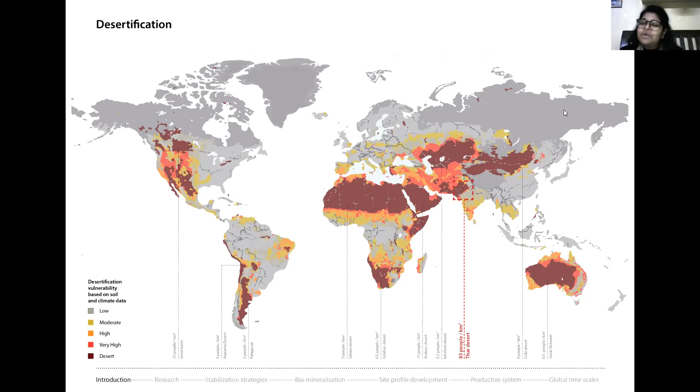For our thesis, we primarily focused on the world's most populated desert, the Thar Desert. The Thar Desert constitutes the northwestern part of the Indian subcontinent, where 76% of the land is exposed to wind erosion and sand deposition forms of land degradation. Within this region, our test site is subjected to an extremely high wind erosion index, meaning the strong winds blowing in the region make the terrain absolutely unstable, with a constant influx of sand into the region and a constant dissipation of sand out of the region.

Using Landsat imagery, when we zoomed further into the area to see if there are possible settlements, we saw these mushrooming small settlements within the region, mainly housing the interdunal plains. What happens in these interdunal plains is the wind velocity drops, and that is where maximum sedimentation takes place.

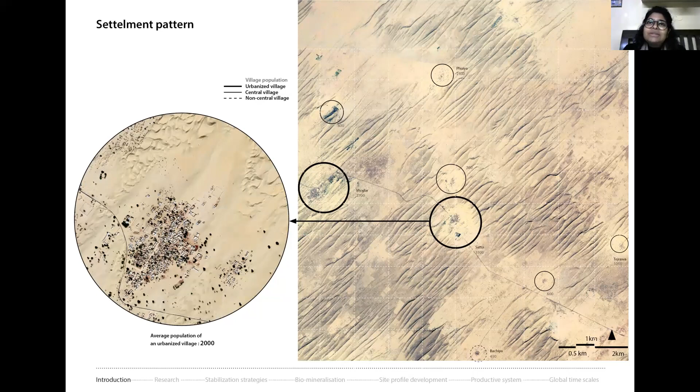By Landsat imagery, we realized that all these settlements were actually informal settlements, rural areas, decentralized villages which lacked infrastructure. Also, because there was a serious dearth of information that we could find, we made a visit to the site to see the ground realities.

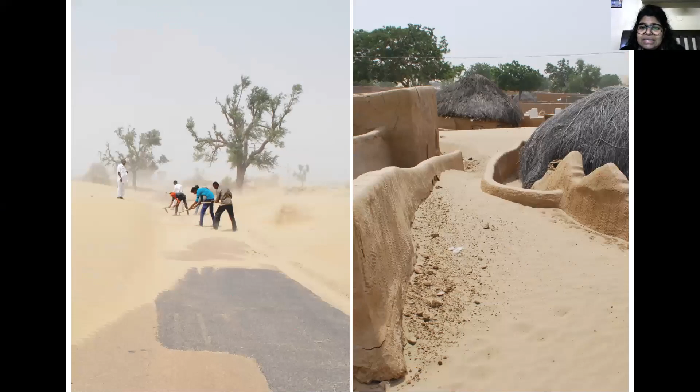To my shock, we found that the weather conditions and living conditions are so extreme that they don't even support the life of livestock. The infrastructure is still very primitive and vernacular. The terrain is absolutely unstable with constantly changing and shifting grounds, and even the existing infrastructure is subjected to heavy sedimentation.

Towards my right, these are houses which were completely submerged under the sand. And this was the only road leading to this remote area of the country, which was again absolutely covered with this constant influx of sand. People had to manually remove the sand from this region.

Another observation we made during the site visit was that there's an absolute shortage of water resources and a significant absence of green cover in this region.

This made us ask how we can tap into sand stabilization techniques and redesign the settlements in this region. When we were asking this question, we always kept at the back of our mind one thing: whom are we designing it for? Our idea was that since the people inhabiting these regions are locals, migrants, mainly agriculture practitioners, these people are well versed with the textures, colors, and materials of that region.

Whatever proposal we propose has to come from the site. We cannot immediately propose something that is very alien to these people. This image on the side is our first design ambition. It's not a design outcome, but a vision where water, agriculture, and habitable spaces could come together in synergy. At the same time, the highly unstable terrain can be stabilized, facilitating the flourishing of these systems, while a natural mechanism deflects the influx of sand out of the system.

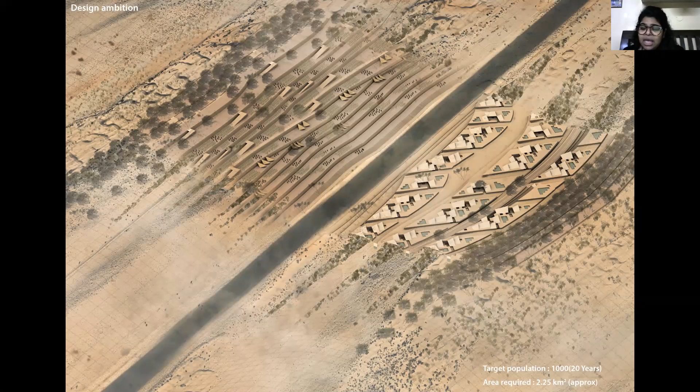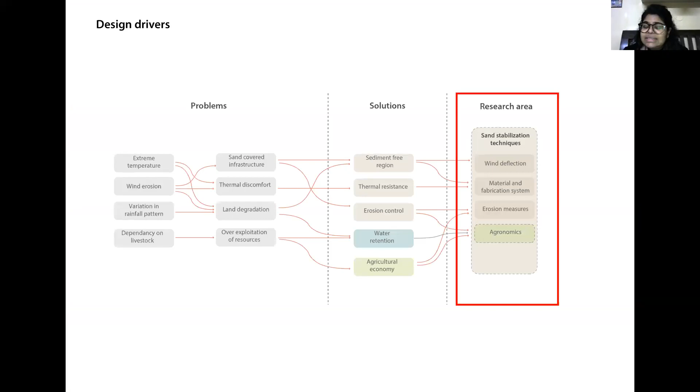These were our prime goals when we went into the research part. My main research areas for the thesis were wind deflection systems, material systems, erosion measures, and agronomics. When looking at ecological measures, we were conscious of creating an amalgamation of existing and modern mitigation interventions. The erosion control and wind deflection systems are primarily traditional systems still followed in the area.

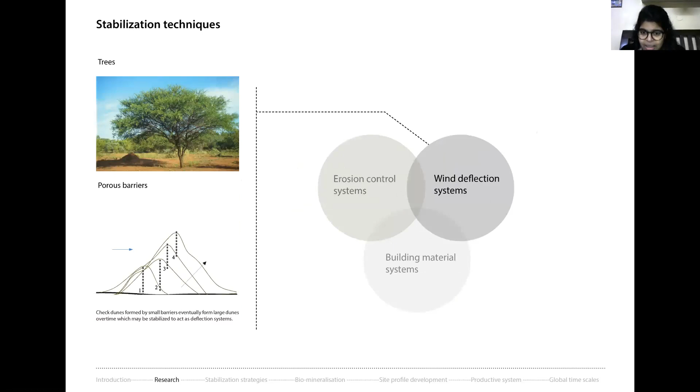We specifically wanted to focus on a new building material system. Looking at the site, we made a shift in how we viewed the problem: the abundance and influx of sand suddenly became a resource for us, since sand could be used as a new type of building material if combined with a proper construction binder.

So we looked into the technique of biomineralization. This is an existing technique investigated by material scientists, engineers, and architects, where if you take sand and add biopolymers, they form a gel matrix in the sand, creating a really strong material with compressive strength comparable to a concrete block. At the same time, it has ecological benefits, being biodegradable with almost zero carbon footprint.

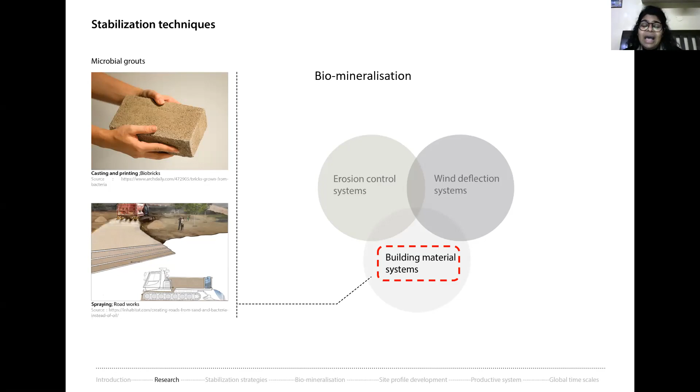To explore this material system in context of our site, we looked into the biopolymer sodium alginate, which is readily available from the vicinity of the site, and investigated how we could develop a composite material system from it.

If you mix this biopolymer into sand and add calcium, you essentially get a composition similar to sandstone. Historically, all the monuments in India, specifically in this region, have been standing for centuries, and the prime composition of these heritage buildings is sandstone. So biomineralization helped us attain a very strong material with compressive strength comparable to a cement block, with lower carbon footprint, and the curing time is almost half that of a cement block.

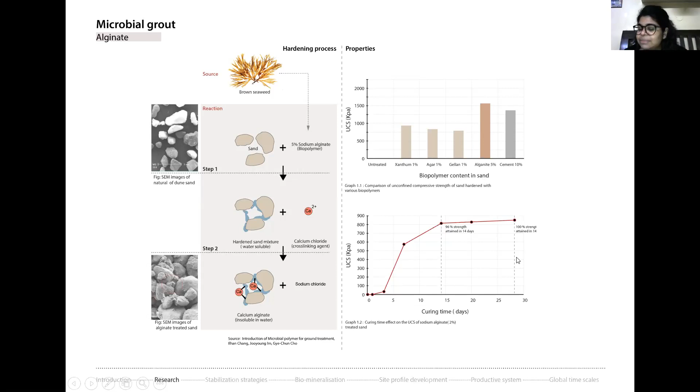We further wanted to investigate ongoing research on the fabrication mechanism of biomineralization. We came across an interesting study carried out at TU Delft with other institutes exploring biomineralization and scalability. They tested the hardening of sand for different volumes using dry mix and cast method versus injection method, where you inject biopolymers into huge volumes of sand via biogrouting. The results showed biogrouting is an efficient way to scale up this technique.

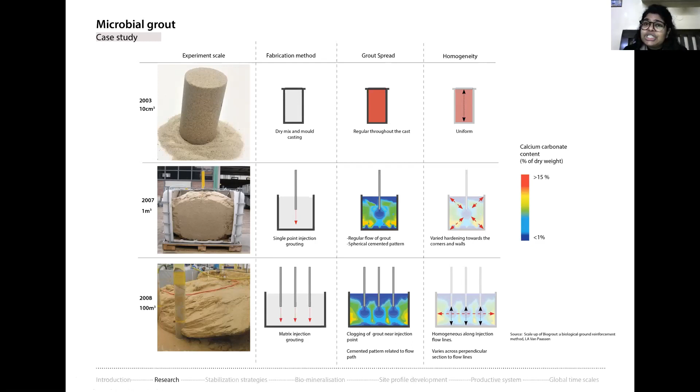Even though the homogeneity of the sand mixture reduces as you scale up, with increased density of injections you can get more homogeneous and compact sand. This suggested and gave us a hint of what fabrication mechanism we could explore to develop our site.

For the stabilization technique, now that we had a material system and fabrication system in place, we had a vision to use this material system to stabilize the existing sand and convert it into agricultural terraces and in-dune structures. At the same time, for incoming sand, we wanted to deflect and automate the deflection using the wind itself.

Earlier I showed you the picture where strong winds bring in the sand, but we looked at the strong winds as an opportunity to take the sand away from the system. Once we had these three things in place, we could bring water and agronomics back into the equation and create a holistic developmental plan for the site.

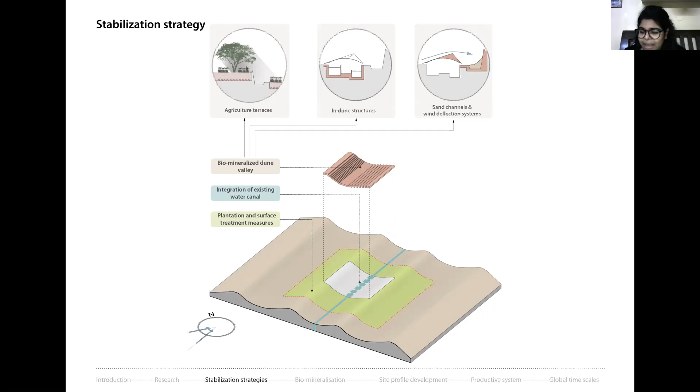But before we proposed that, it was essential for us to understand the dynamics of the region: how the wind brings in the sand, from what direction, the velocities across a dunal section, and the net sand transport direction.

So the sand is predominantly getting winds from two directions, and the resulting vector makes the site transform into this array of linear dunes. And because of the bimodal wind, the site gets divided into windward and leeward faces. Because of this, the shape or section of the site shows a varied pattern in sedimentation.

Where maximum sedimentation happens on the dunal crest and least sedimentation happens in the valley, where the strong wind vector filters away the sand. Now going further to biomineralization, taking inspiration from experiments done at TU Delft, we proposed our own mechanism where we selected a machine that could run over the dunal fields with a matrix of injections and inject large chunks of land at the same time to accelerate the fabrication mechanism.

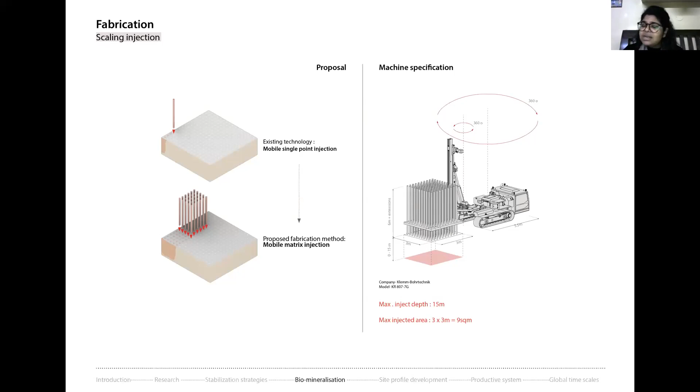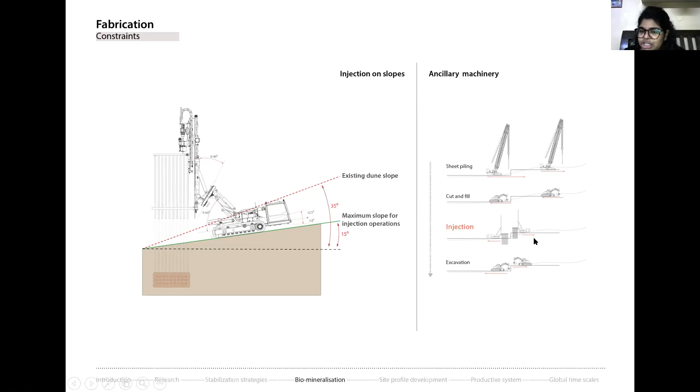The picture on the left shows how the machine is efficient in traveling over the dunal fields and injecting at different depths. But the existing dunal slope was greater than what the machine could withstand, so we also proposed manual flattening of the dunal slope wherever we wanted to inject the biogrout. For that, we needed additional ancillary machine support—just like construction in mountainous regions, you have sheet piling, you remove the excess sand to flatten the dunal slope, then inject and at the same time excavate the unhardened sand.

So our next course of action was to develop a toolpath for a machine. For developing the toolpath, we wanted compact packing of those hardened 3 meter by 3 meter plots, because in separation or over-injection, there is loss of material, and without compact packing of these hardened patches, the subsoil remains weak.

Also, since the machine has the capacity to rotate from the same position and inject at multiple sites, it should do that to reduce time lost in parking and injecting. At the same time, the toolpath should be such that the machine does not overrun the pre-hardened surfaces. If the machine were to run in the XY plane computationally, it could come up with almost infinite possibilities of toolpaths. So we narrowed down what type of curve or trajectory could we select where the first two objectives are inherently met.

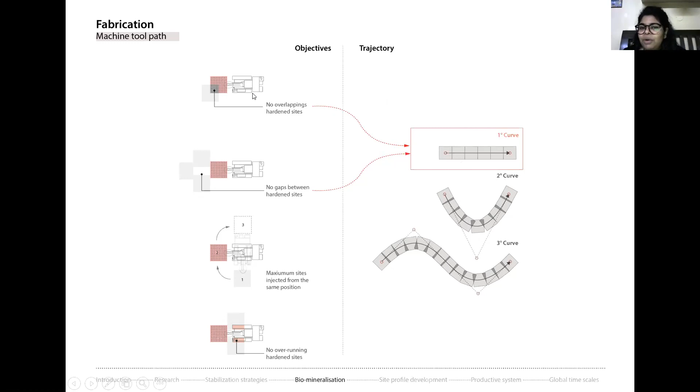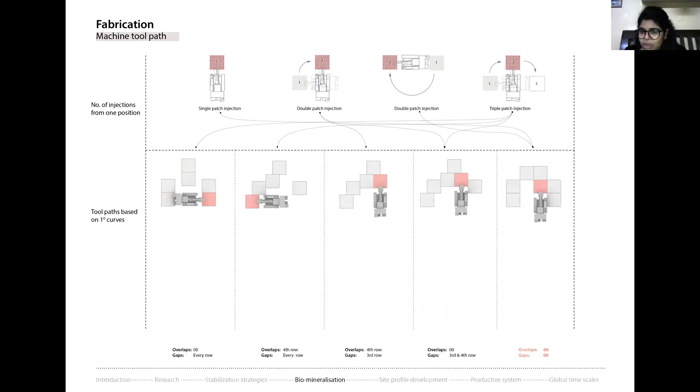We observed that toolpaths based on a 1 degree curve could inherently avoid the problem of over-injection and gaps between hardened patches. So we wrote several algorithms based on the machine's position as inputs and came up with over 200 toolpaths. I'm showing a few of them here, which show how the machine, from its different properties of rotation and injection, could come up with several toolpath options. We selected a toolpath which has zero gaps and zero overlapping patches.

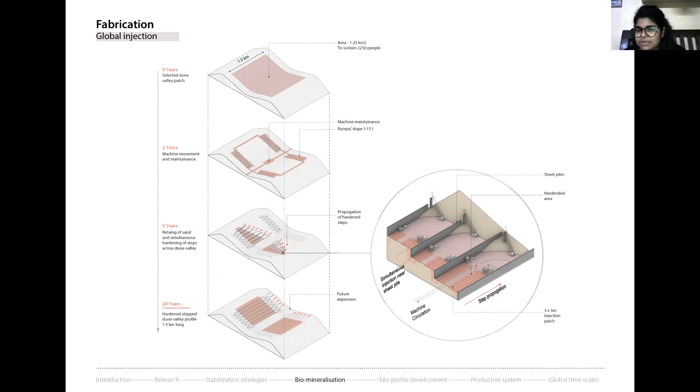The selected toolpath has a spatial constraint of 12 meters, and it could inject one single block in a day, considering the machine runs for 12 hours—6 hours to inject the biopolymer and 6 hours for calcification. So we projected that in a day, the machine could inject one block. Keeping this time frame in mind, we thought the site would take approximately 20 years to develop a stretch of 1.5 kilometers. Of course, we revisited this time frame as we further detailed and integrated our different systems into our fabrication mechanism, which you'll see towards the end of the presentation.

With this fabrication mechanism, we realized the machine has the potential to harden different profiles and induce different functions. For example, the ability of the mast to travel up to depths of 15 meters could facilitate multi-level profiles. Also, the material is hard enough that with a diamond cutter or any cutter, we could give it a particular shape for aerodynamic reasons. And we could excavate the unhardened sand and fill it with fertile soil to promote the growth of plant species.

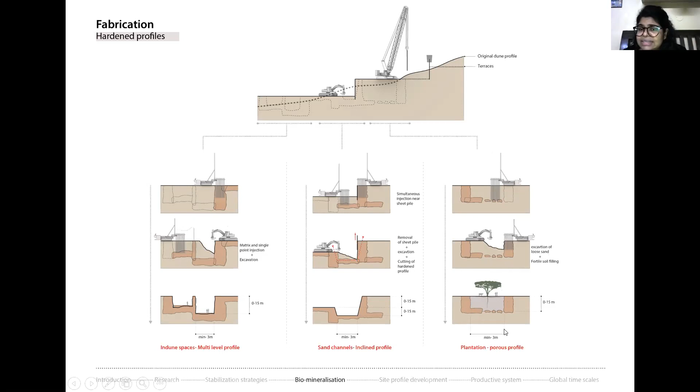For site profile development, there were mainly four things we were looking at: terraces for sand stabilization, sand channels and wind deflection systems to take care of the incoming unstable sand, and in-dune structures.

I'll be talking about each one of these in detail in further slides. So now first, talking about terraces.

Transforming this dune section into terraces was not really an intuitive design decision. It came after the observation that the site has basically no texture because of no vegetation. It was a barren piece of land, and because of that there was no self shading property, so the land, both in summers and winters, was exposed to high solar radiation. So in order to reduce the solar radiation, the most obvious step we thought was we had to introduce surface texture.

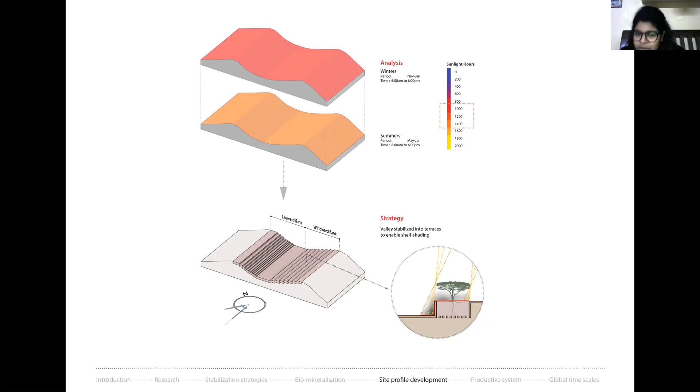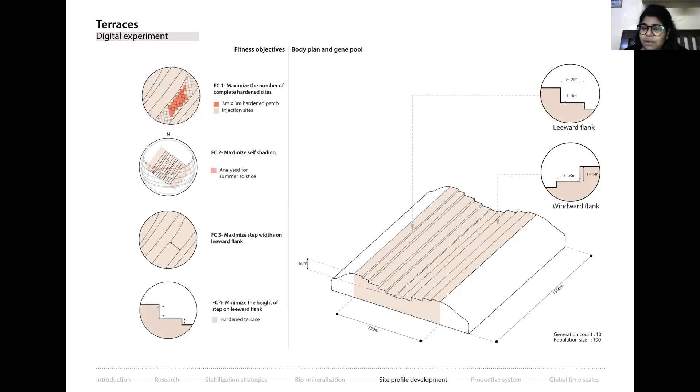Adding these terraces was the most obvious choice for us. To develop these terraces, we used the computational methodology of multi-objective optimization, where our objective was to generate a series of steps on the side such that each step had enough width to accommodate habitable spaces, could cater to our prime objective of self shading, but at the same time, for easy circulation, had minimum height differences amongst them. A lot of these criteria were contradicting, so we used multi-objective optimization as a tool to get a series of different morphologies of these steps.

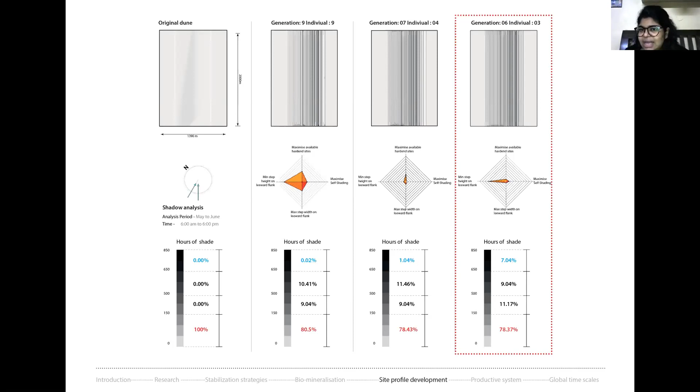But we observed that there wasn't any significant or radical difference in morphology of terraces that we got. So then we ran a second series of tests, a shadow analysis, to study which of the morphologies suited best or provided maximum self shading. We selected a patch which did that for us, and this became our overall morphology for the site.

Furthermore, in order to zone our programs of agriculture and habitable spaces, we looked at which side of these terraces gets maximum self shade during the hottest hours of the day, from 11 a.m. to 2 p.m. We realized that the windward face gets maximum self shading, so it becomes suitable to zone our habitable spaces there, and agricultural spaces on the leeward side of the dune.

Moving on to talk about sand channels. Now, while the terraces took care of stabilization of the existing, unstable sand, sand channels basically took care of the incoming sand.

For that, we looked into the principle and the physics of sand: that sand particles are automatically moved or displaced from a surface if the wind velocity achieved is 6 meters per second. In a bimodal wind direction, the wind coming from this direction is the strongest. So our idea was to create certain ditches onto the site where the incoming sand from the west drops into these ditches, and the sand blowing through these ditches, because of Bernoulli's principle, accelerates and takes the sand away from the system. It's like a natural cleansing for our site.

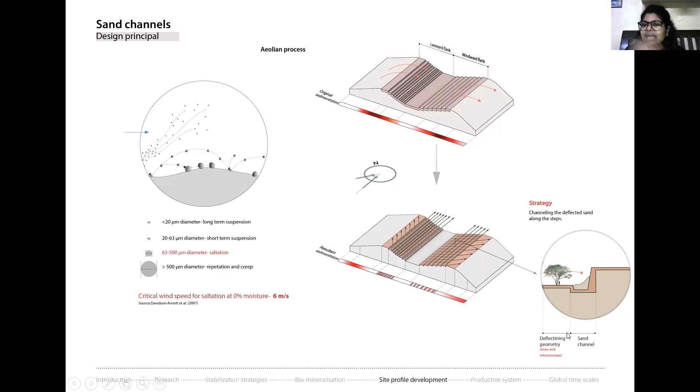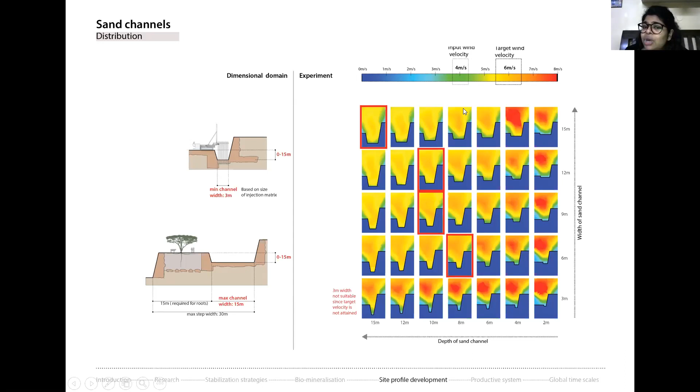For this reason, we created a matrix of sand channels based on a machine's constraints, since a machine could inject a maximum volume of 15 meters by 15 meters, as I mentioned earlier. We gave an input velocity of 4 meters per second to see in which sand channel the speed gets accelerated and attains a target velocity of 6 meters per second. We observed that there were certain combinations of these sand channels, marked in red, that actually achieve this objective of accelerated wind velocity, which helps in taking the sand away from the system.

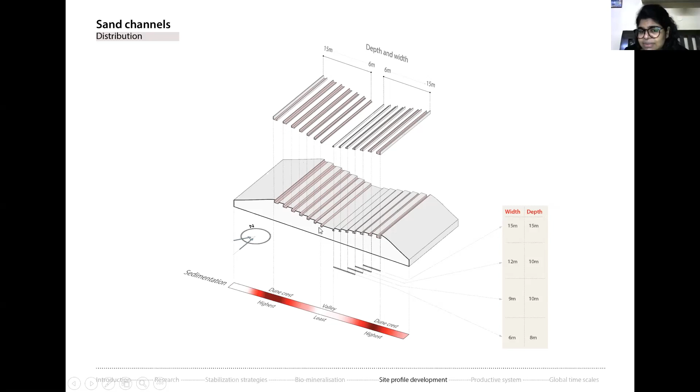Qualitatively, we realized that as sedimentation is highest towards the crest, the bigger sand channels should be distributed more towards the crest, and the smaller channels should be located more towards the valley. I'll come back to the wind deflection system after I discuss the in-dune structures.

This question was asked to us by a lot of people: why are you building in-dune structures? You already have this technique of biomineralization, and scientists have proven that biobricks are highly compressible, have high compressive strength, and they work. Why do you want to build in-dune structures?

Our answer was that in-dune structures actually help environmentally a lot in this region. There is a heat exchange between the subdunal soil and the structures, which can automatically reduce the temperature to a great degree. Secondly, the winds blowing in these regions are so hot and loaded with sand that anything you build below the ground, you're essentially avoiding exposure to these hot winds. So for these two reasons, we wanted to build these in-dune structures.

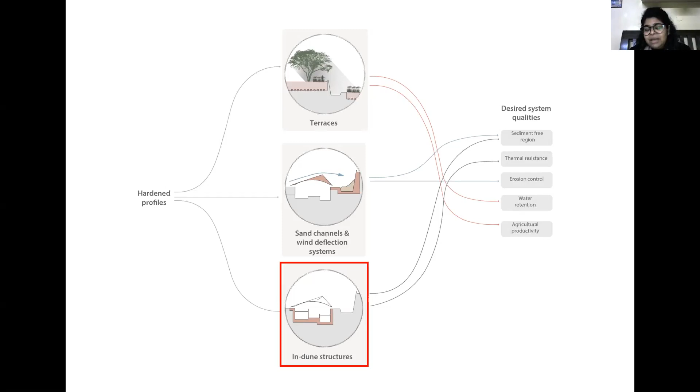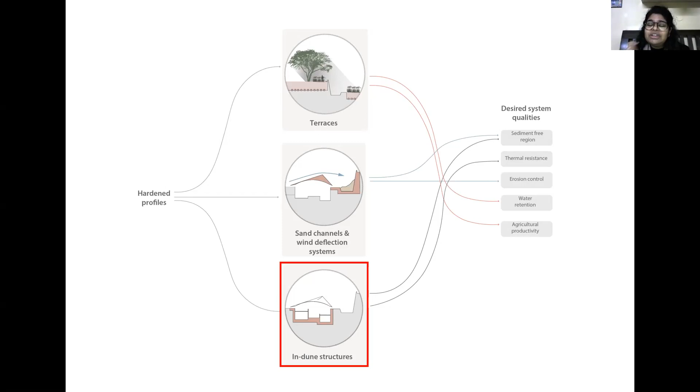Furthermore, for building in-dune structures, we had to make a radical shift in the way of structural thinking, from prefabricated forms of construction to more granular cementation of the sand. By that, I mean we proposed bio injection of our biopolymer within a grid of 3 meters by 3 meters.

With a matrix of injection, we proposed that you could cast your foundations. With single point injections, you could monolithically cast your walls. And once you have this hardened profile on the ground, you could excavate the unhardened sand and stack it up with secondary material, which could again be locally procured, and create these cavities or excavated pits which are ready to be inhabited.

Once we had this mechanism in place, we wanted to divide our leeward side into colonies or clusters where our habitable spaces could finally come. Based on the urban design principle of walkability and sedimentation pattern, we subdivided our plot ranging from 75 meters to 200 meters.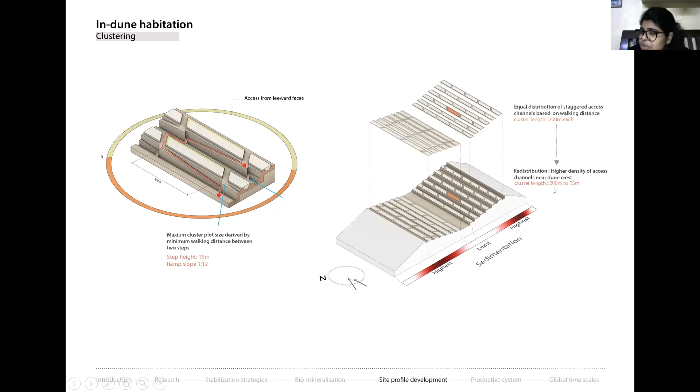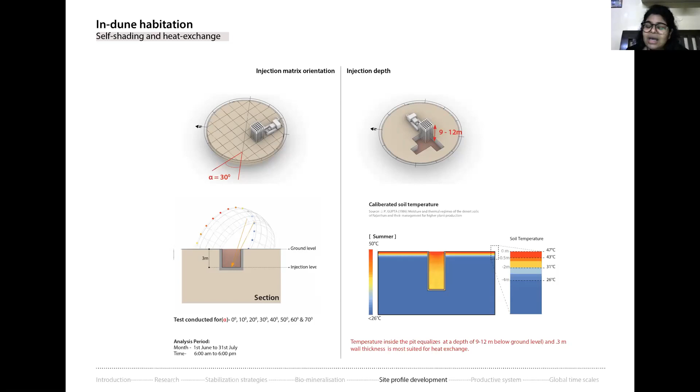This means you don't have to go all the way to 15 meters down. You can limit your construction to 9 to 12 meters and have a reduced temperature of 30 degrees Celsius. Now, 30 degrees in itself is a high temperature, but for a region which has temperature as high as 50, a drop of 20 degrees Celsius is really, really significant.

So for developing the morphology of our habitable spaces, we split our experiments into 2 stages. The first dealt with the planar aggregation of spaces, essentially how we would generate a plan. The second dealt with the volumetric assembly of these spaces. I'm going to first explain the planar aggregation of programs.

Based on site visits, we created a matrix of what all functions are required by what family sizes. We translated this data computationally into cells, where each cell stored the information of family size, the number of units of functions it needs, the hierarchy of occurrence of these functions, and certain adjacency rules between these functions.

In order to simplify it, we categorized our functions into primary, secondary, and tertiary categories, where courtyard spaces became the primary functions around which all other spaces would aggregate. In multi-objective optimization, we would say these became our gene pool or genes, with our rule set of aggregation where we set rules related to zoning, orientation, and connectivity between these spaces.

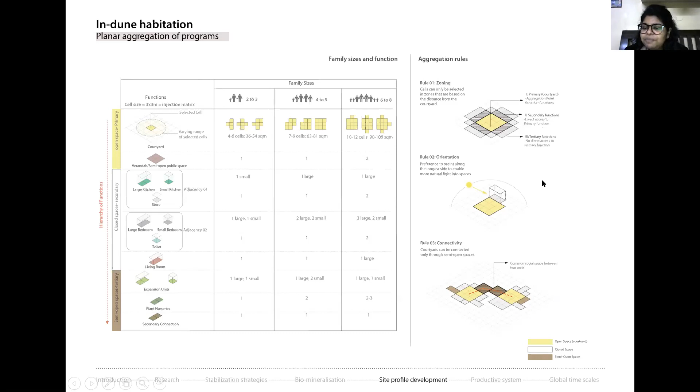The primary, secondary, and tertiary functions essentially had the spatial quality of being open, closed, and semi-open spaces. So we wrote our first multi-objective optimization script with the objective that we wanted our spaces arranged in such a way that they have maximum perimeter to facilitate heat exchange.

Certain spaces like bedrooms and nurseries should have a particular quality of space, in terms of reduced solar heat gain. And there should be an increased social fabric within these spaces, so we wanted maximum connectivity between these units.

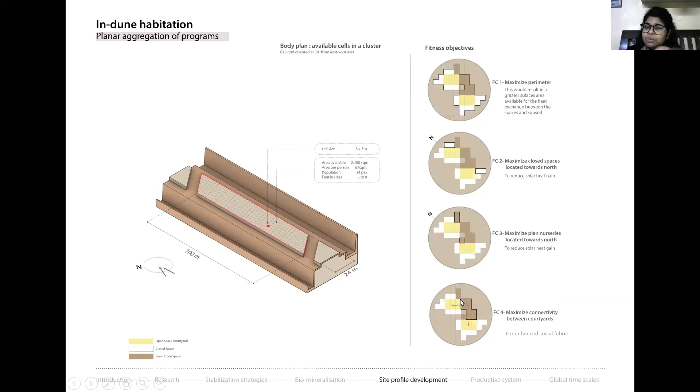Based on that, we ran this optimization script, which gave us multiple planar aggregations of functions. We selected our phenotype, or the design outcome, based on the criteria that whichever configuration shields the open spaces of our courtyards naturally by populating closed spaces around it, we would prefer that. Also, whatever configuration gave us maximum coherency of units for enhanced social fabric, we would select that phenotype or design outcome.

Moving on to the second stage of morphological development, we wanted to see how these spaces could translate into actual volumes and be arranged in space. The microclimate analysis I showed a couple of slides back, where we saw that temperature drop of 20 degrees Celsius, actually helped us to stratify these functions in section based on their requirements.

For example, bedrooms, being the most critical spaces, were preferred to be located at the depths of -9 to 12, so that they are more thermally comfortable for inhabitation, whereas living spaces and kitchen could have relatively higher temperature.

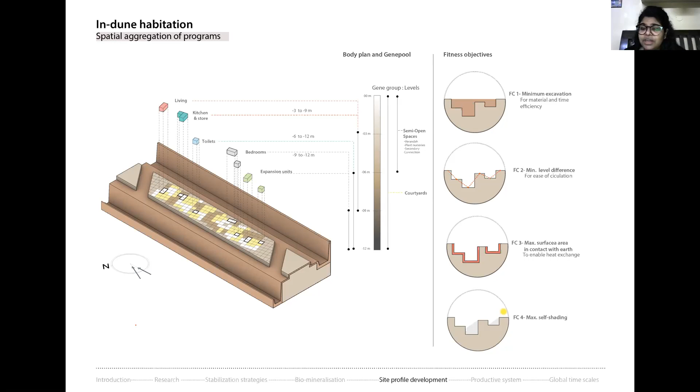Once we had set this experiment, we wanted to evaluate design options based on criteria where we could have minimum excavation, there could be easy circulation, and at the same time, there could be maximum surface in contact with earth for heat exchange. At the same time, the configuration should enhance self-shading.

So this script of spatial aggregation of programs essentially showed us how our spaces are coming together in volume and in section, and how we are getting these different qualities of open, closed, and semi-open spaces.

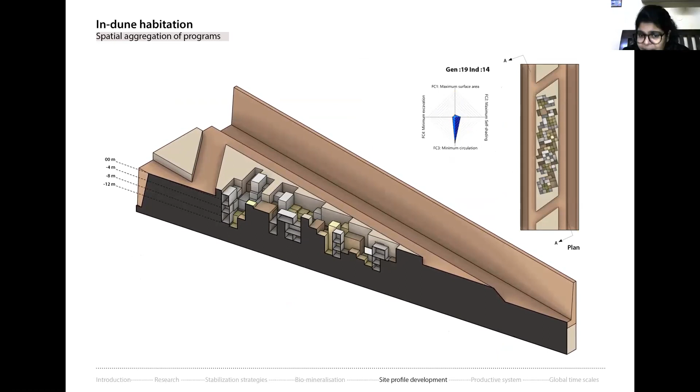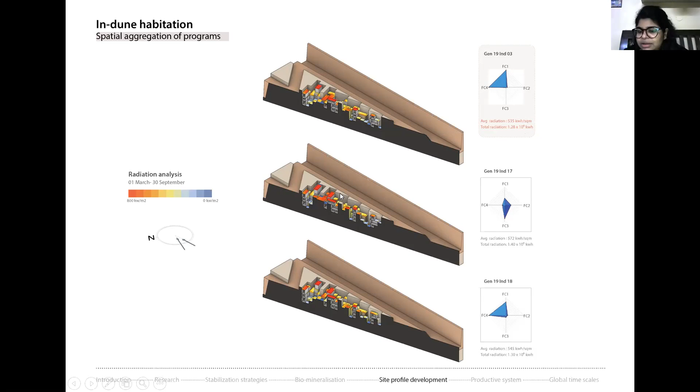To select the design outcome, we ran another set of tests which suggested we pick the design outcome where the roofs had least solar heat gain. Because the roofs are the main architectural element responsible for heat gain, we selected the one where the average or total radiation was least amongst all the morphologies from this experiment.

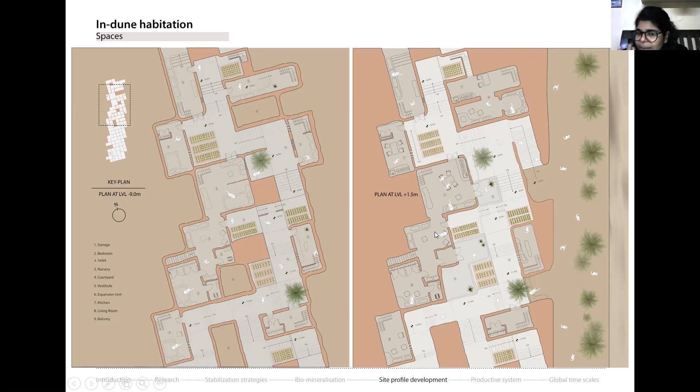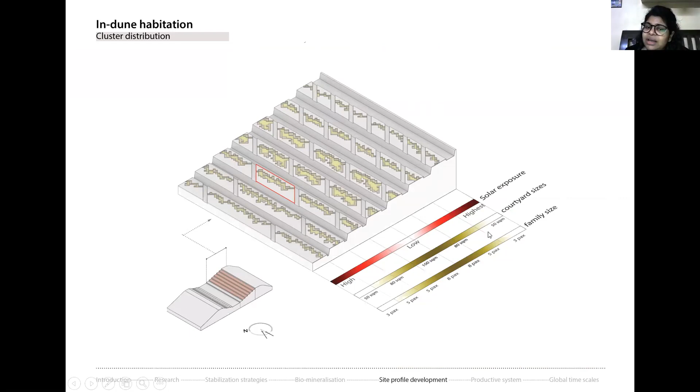Again, we did a qualitative assessment of how our courtyards would be distributed along the site, where the bigger courtyards are suitable for regions with the least amount of solar exposure, versus smaller courtyards given to regions with maximum solar exposure.

Now that we have in-dune structures and sand ditches in place, the wind that carries sand could drop it either in these in-dune structures or in these sand channels. So how do you make sure the sand is not dropped in the in-dune structures, but is actually deflected towards the sand channel and moved out of the system?

For that, we needed a wind deflection system, which essentially became a roof structure for us. This roof structure also needed to comply with certain criteria. For example, the high wind speeds in the region force a lot of wind load and lift forces onto the roof, so it should be able to withstand them.

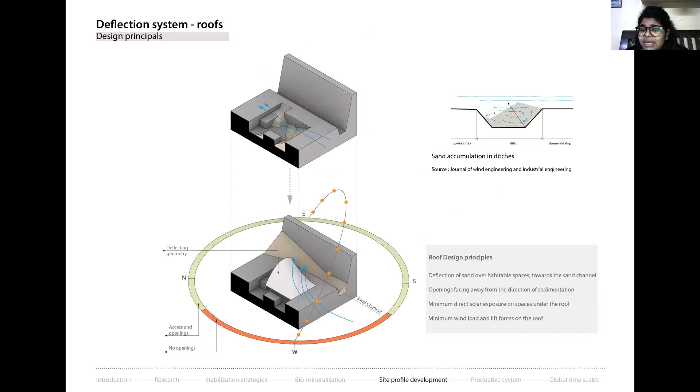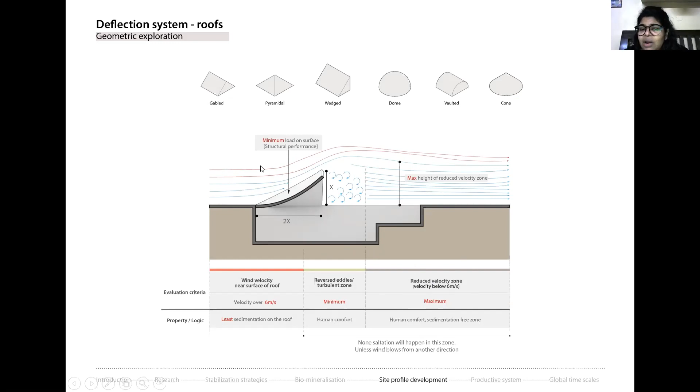At the same time, it should be oriented so it can deflect maximum sand into these ditches or sand channels. So we did a primary study of different roof shapes to see which is more suitable, and tested them for criteria like minimum reduced turbulence zones, maximum region with reduced velocity in both section and plan, and surfaces that could show good structural performance.

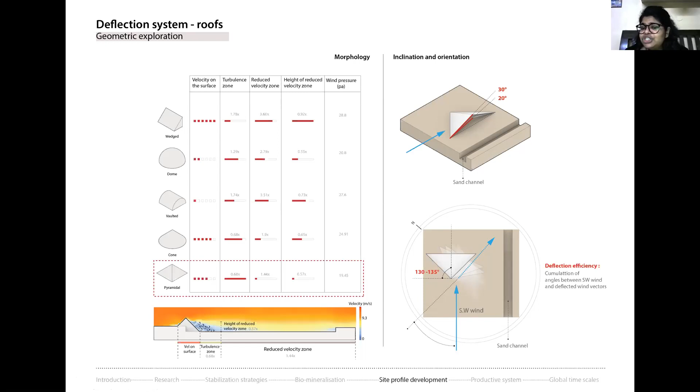Based on that, we realized pyramidal roofs work best for us. Within the pyramidal roof, an inclination of 30 to 20 degrees and an orientation of 130 to 135 degrees in plan is highly efficient in deflecting sand into the pit.

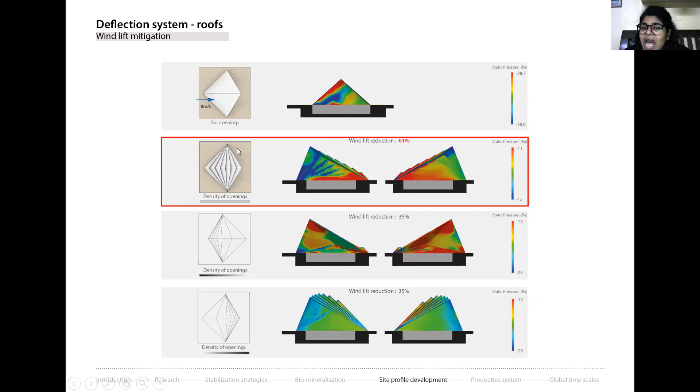Since wind loads are so strong, there's also an upward thrust that comes, so it was essential to introduce openings into our roof structure to mitigate this wind lift. We realized that a uniform density of openings actually mitigates the wind lift by 61%.

We wanted everything to come from the site for the site, so we wanted to develop a material system based on all the materials available on site. We selected them by generating a 4D evaluation matrix, testing different material combinations for roof spans, lifespans, thermal conductivity, and their distance of production from the site.

Based on all these criteria, we realized we want a roof system with a structure made of wood, cladded with fiber-reinforced sand and biopolymer tiles—the biopolymer being sodium alginate, which we are already using to transform the terrain and generate indoor spaces.

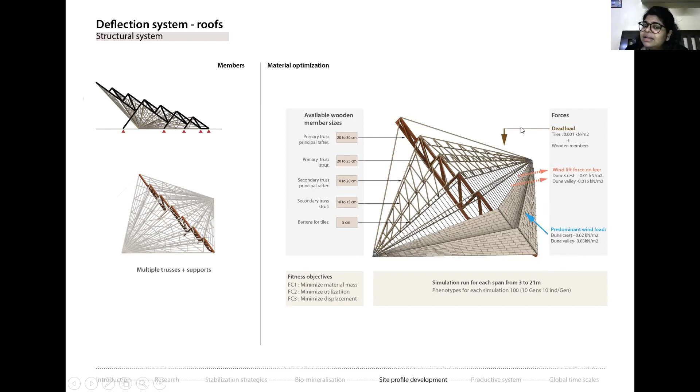We also wanted to know the structural system the roof should have. So we did a market survey on available wooden member sizes and how they can be arranged to perform structurally for predominant wind loads, wind lift forces, and the dead load of the structure itself. Based on these criteria, we ran a series of structural tests.

These tests suggested that roof spans beyond 15 meters did not function well structurally, so we had to limit our roofs to spans from 3 meters up to 15 meters. Qualitatively, based on sedimentation, these roof spans linearly increased from valley to crest.

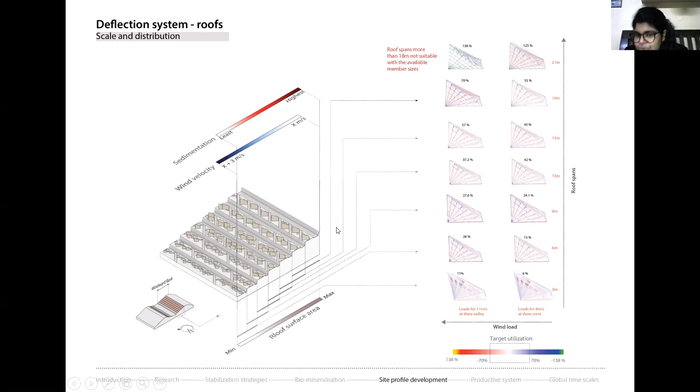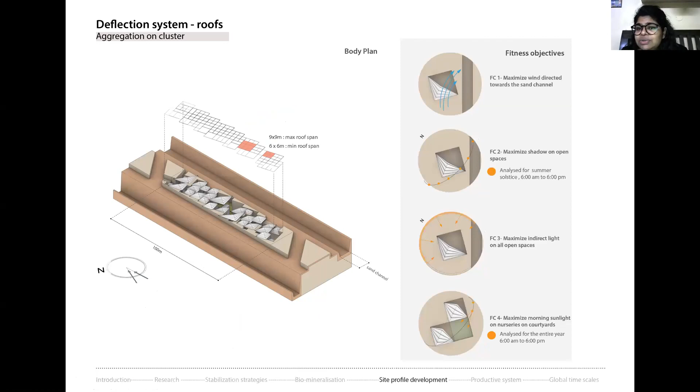That led us to write a final multi-objective optimization algorithm where we wanted to test our roof aggregation such that it could direct maximum sand towards the channel, let indirect sunlight come into our excavated spaces, but at the same time maximize shadow on open spaces.

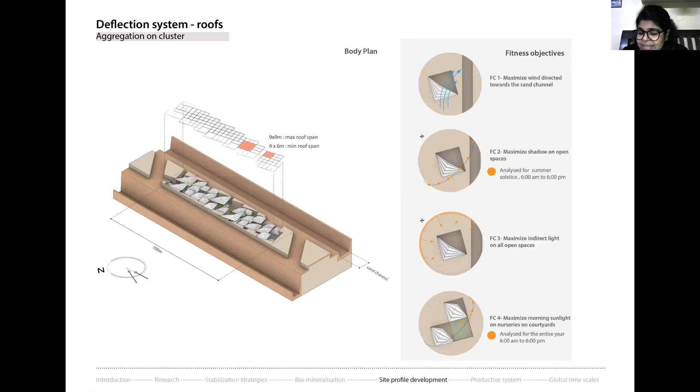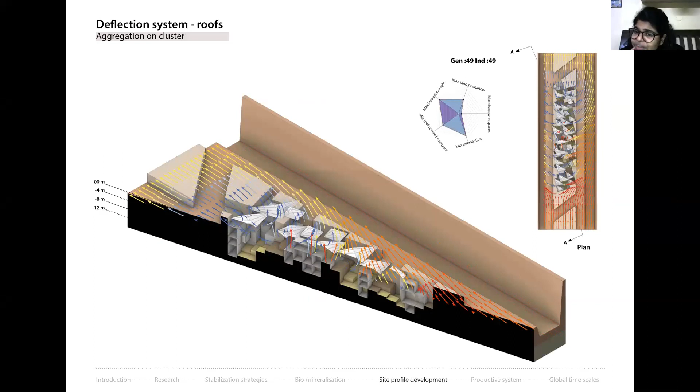We ran our series of tests for this experiment and got over 900 configurations of roof aggregations, studying how they deflect the wind, prioritizing maximum deflection and reduced wind velocity on the lee side. We selected an aggregation of roofs for the site.

Now that we have our terraces, sand channel, wind deflection system, and inhabited spaces in place, we look at the cluster time scale: how from day 2 we start getting machines onto the site, how within 45 days we start injecting these spaces, and how within 2 months we start excavating them, laying our additional stacked floors.

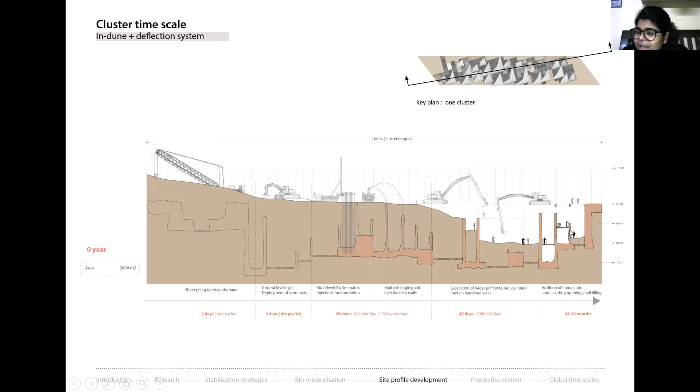Within 3 years, this cluster slowly becomes habitable, where you can see different spatial qualities of large family units, medium-sized units, small family units, with a roof system over it, and protected nurseries for plants to flourish. Within 10 to 20 years, the spaces are further excavated and used for human use as the population grows.

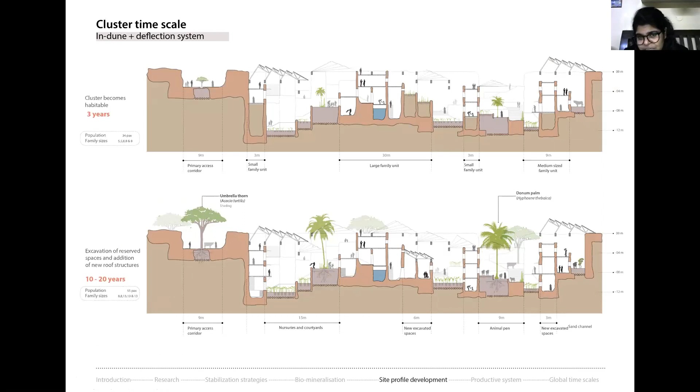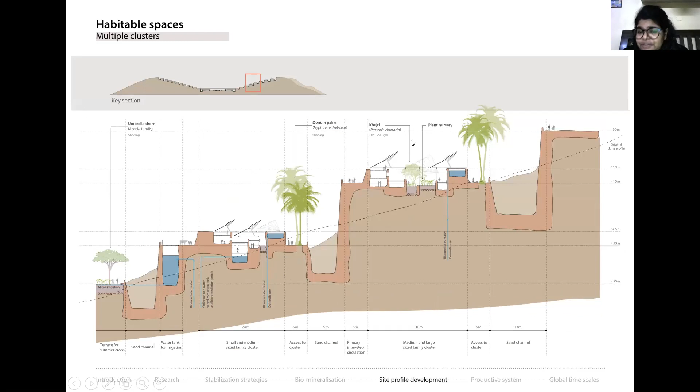While this was an intra-dunal section, this shows how we imagine our different spaces coming at different clusters, at different steps. This is how we essentially visualize our spaces to be, the surface textures and how people would inhabit these spaces.

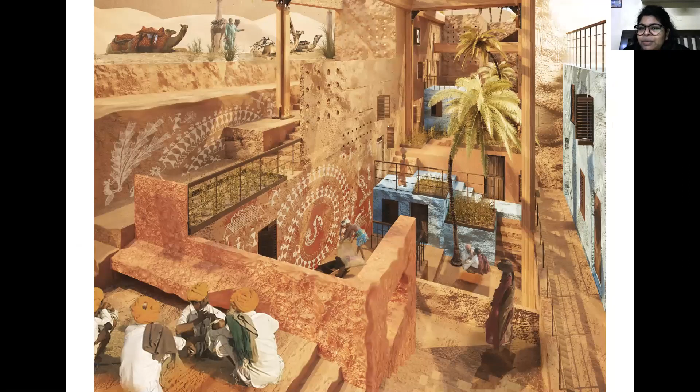I agree these are just visualizations, and there will be a huge difference when we actually do biogrouting on the site. This was a comment we kept getting for our thesis, and I'd like to mention it here: we could not conduct any physical prototyping for this sort of architecture because it is very site specific. The experiment, how much your biogrout spreads onto your site, is very site specific.

So whatever we proposed so far is more like a theoretical framework. Instead of looking at it as an end product, one should look at it as tools, as means we've produced to generate a morphology, an arrangement of spaces that can come in this climate sensitive region. Of course, the surface textures and all will vary based on the physical experiments conducted on the site.

Now, moving on, I'm going to go through this section of the presentation real quick. We move to the productive systems.

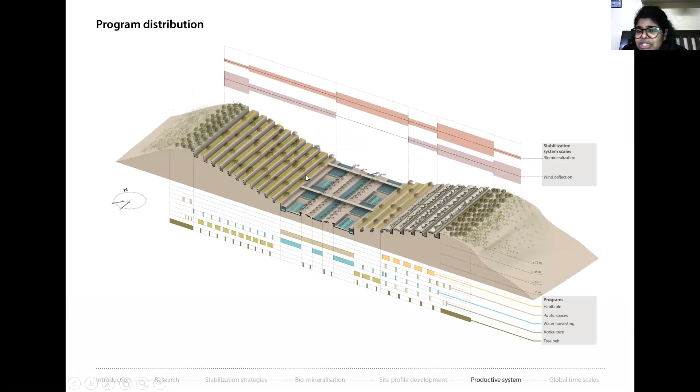This is a vision we had for the site: once we have a deflection system and habitable spaces in place, we merge it with the existing techniques of plantation and erosion measures discussed briefly at the beginning of the presentation, with our agricultural terraces and an integrated hydrological system in the scheme.

We calculated the crop volume needed for a target population of over 2000 people. Based on those calculations, we realized that a stretch of 200 meters of the site becomes self-sufficient, meaning the people inhabiting that stretch would require the agricultural area within it to be self-sufficient. This gave us a phasing strategy: the site needs to be developed in phases of 200 meters.

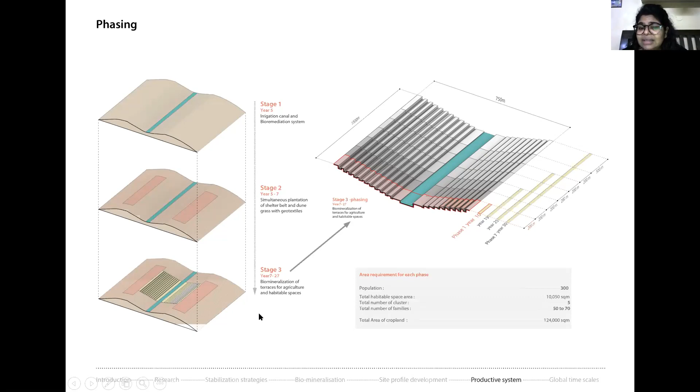Based on these calculations, we revised our global time scale, and it suggested the site could be developed in 27 years. Moving on to the hydrological scheme, we looked into the existing resources of artificial irrigation canals, aquifers present on the site, and our proposal to collect surface runoffs.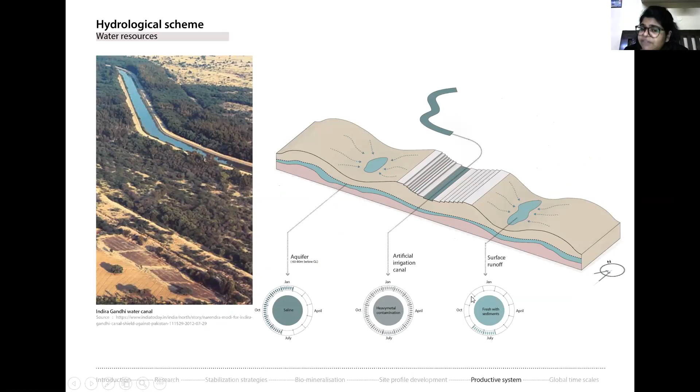We looked into the treatment of these waters of different qualities, as each source had different levels of contaminants. We wanted to tap into the excessive solar power in this region, the sunlight we get, to perform solar desalination. We also propose bioremediation to purify this water.

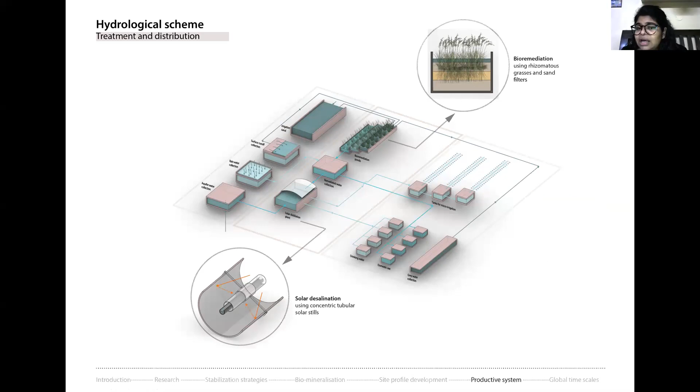This water is used for agriculture and for people's domestic uses. Here is a view of how we designed our hydrological channel, such that it is functional for three conditions: under normal water level, when there is a shortage of water, and when there is flooding.

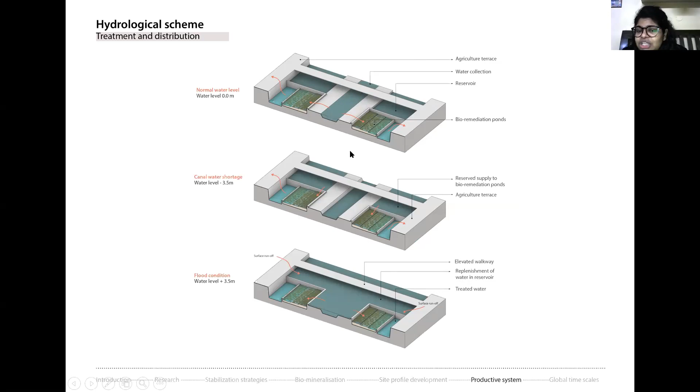So we have these three levels of reservoirs which replenish each other under any of these conditions. This is how we envision our hydrological treatment and distribution.

Close to the hydrological system, we have our public spaces. Once we have these public spaces, that's when we have our agricultural and habitable spaces coming along.

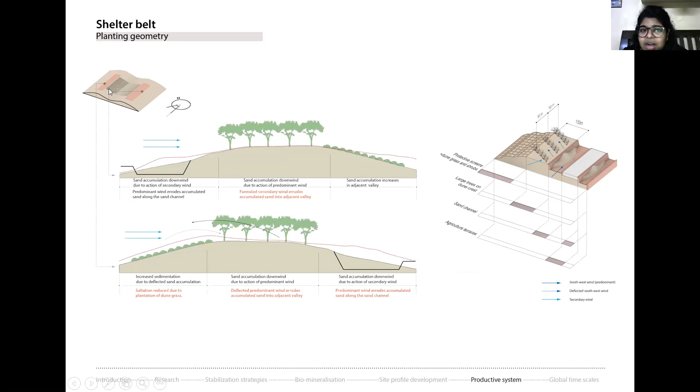We also did a study of all species of shelter belt plants that would be required, how they will be arranged onto the site, on what slope gradient, and based on their roots and dimension, what are the ideal sizes for the terraces for shelter belts.

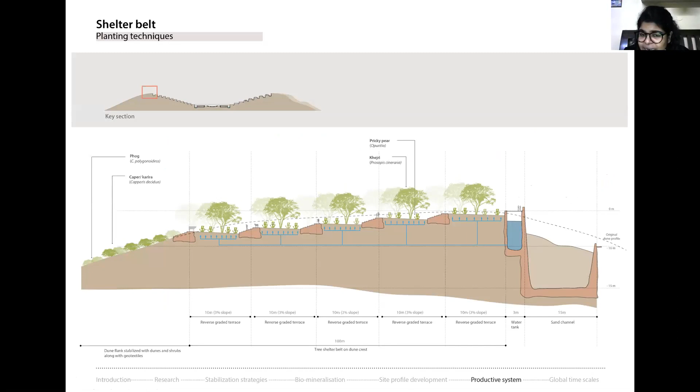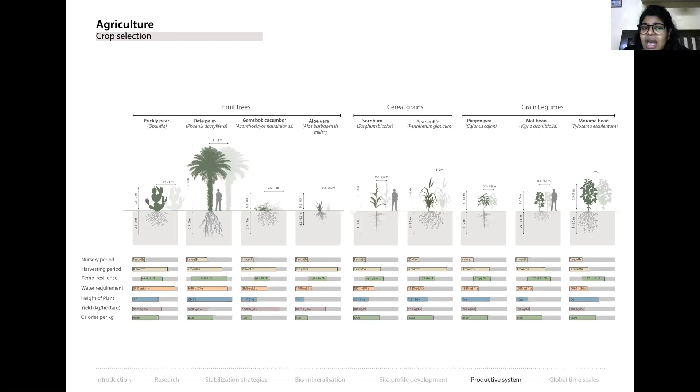We also looked into the types of crops needed for the region, and proposed practices of crop rotation and agroforestry, and how these crops could be distributed based on their seasonal requirements and solar radiation available on each site, combined with existing vernacular techniques to save water, like half-moon pits, ridges, mulching, and bunds.

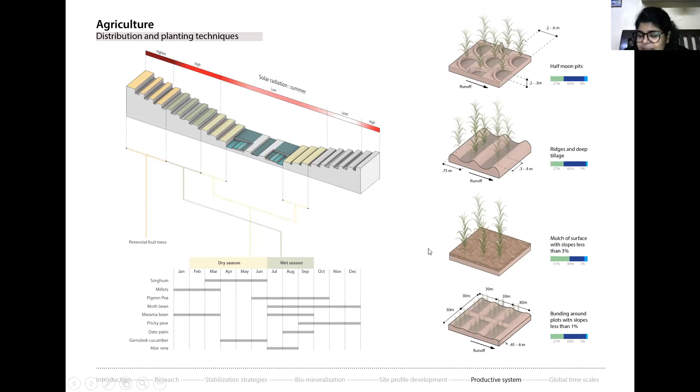This is a view of how our different qualities of species are coming together, and how within these sand channels and water channels, we practice micro irrigation within the system. And to tie it all together, how all our systems are coming together.

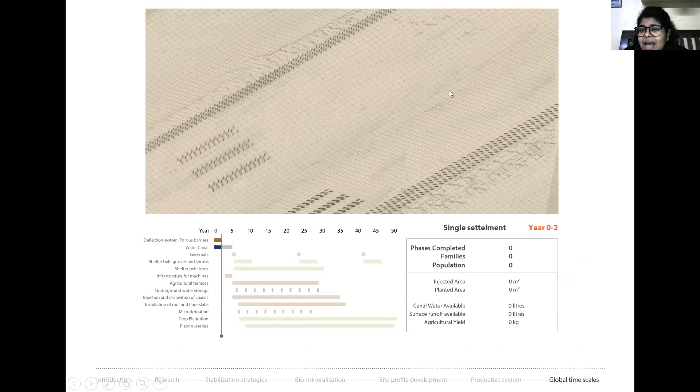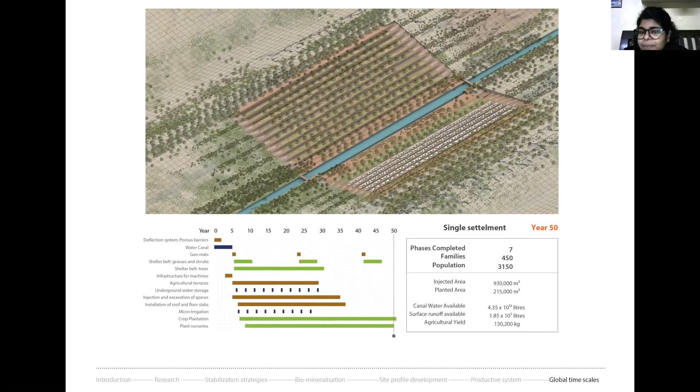Initially we have wind deflectors which deflect the wind outside the system, and mats that stabilize the terrain. Slowly we bring water into the site and lay out ramps and maintenance sites for our machines. In 10 years, two phases could be completed, and agriculture and infrastructure can start coming together. In 50 years, the entire site can be developed, with multiple settlements coming together within this entire region.

To conclude, I would say that because our mechanism throws sand outside the system, these multiple settlements need to come in a staggered arrangement.

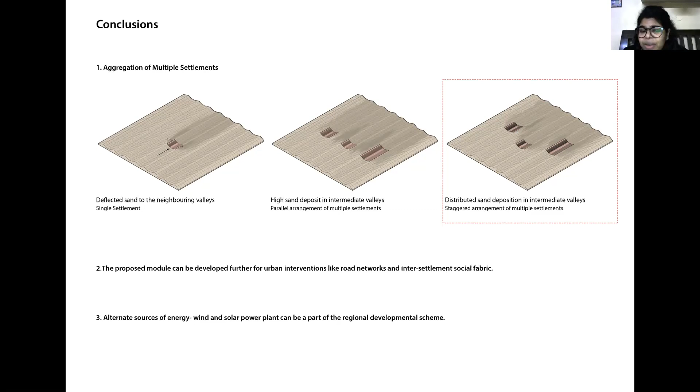There's a lot of potential to take the study further and develop it for road networks and inter-settlement social fabric, and at the same time explore other sources of energy available on the site, like wind and solar power plants for a regional development scheme.

And this is how we envision our site to be. Yeah, that's it. Thank you.

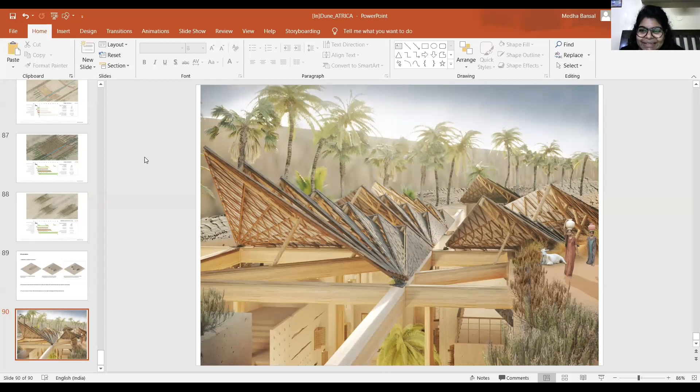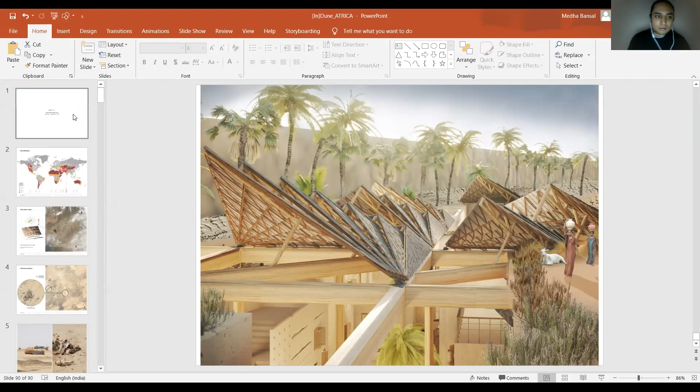Awesome, thank you. Let's see if we have another question on Facebook. I think no, okay. I think there's another question there, they're writing it. I think they haven't finished writing it. I have another question. There it is.